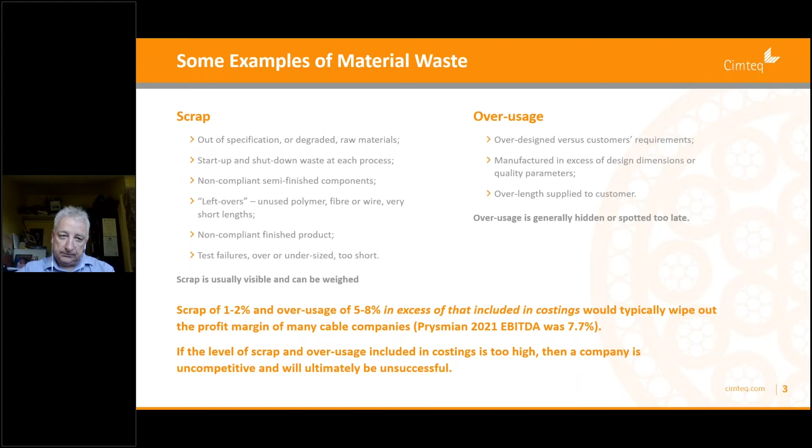Cable making comes in many different forms and many different styles. Our cables can be high volume repetitive cables, standard designs, millions of meters of the same thing, or at the other extreme, low volume manufacturing. That's just how I've chosen to split cable manufacturing, just to try and make it a little bit simple for today's presentation, because it does impact on how we manage materials.

In a high volume environment, it's very price competitive, so there's a strong need to manufacture towards the bottom end of specifications wherever possible, and to engineer cost out of our designs and out of our manufacture. These are also typified by long runs with few changeovers that still need to be slick and efficient in their wastage of materials, but they're less frequent than in the other type of manufacturing. Often they're in standard lengths, either a single manufactured length or many drums cut from a single length. But we can still end up with leftovers and pieces at the end in terms of scrap.

They are usually typified by minimal leftover materials between processes, because we tend to run out the copper, run out the plastic, run out the aluminium, then start a new batch. So we don't tend to have that much waste on materials, but you could on conductors. High volume manufacture really does set itself up for statistical analysis, a standardized approach, and automation. I know many of you invest in those things, but we should be really thorough analyzing our statistics, absolutely on top of our material usage, our overusage, and our scrap in a high volume environment.

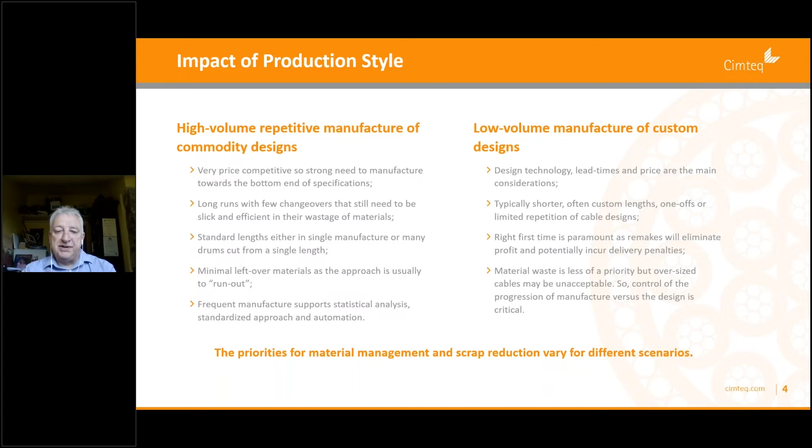Good material management requires good control. I've said here control of production processes and control of production. I've just split them to emphasize a few points.

In terms of controlling the process of production, the point at which material is converted into a subcomponent or cable, we have to make sure we're using the correct input materials and semi-finished products. We could have lots of things on the shop floor that look the same but have been set up for specific orders. If operators select the wrong length of conductor or the wrong insulated core, we could end up with a short length on an order, and also used something due for another order, meaning a remake. So having good traceability of length through manufacturing is important.

We've got to make sure operators have very clear instructions and quality instructions about how to set up the process, how to monitor it, how to monitor quality during production, and how to record their data. If they see a variance, they should be seeking assistance, and absolutely recording all information accurately.

Supervision here, in terms of control of production, has an overlap. Supervision has an active supervision responsibility to make sure operators are doing those things to the required standard. That's simple walking around, checking, maybe repeating some measurements, because people do what you review. Making sure we're getting the right data for production processes ensures we've got the right information to understand our material usage.

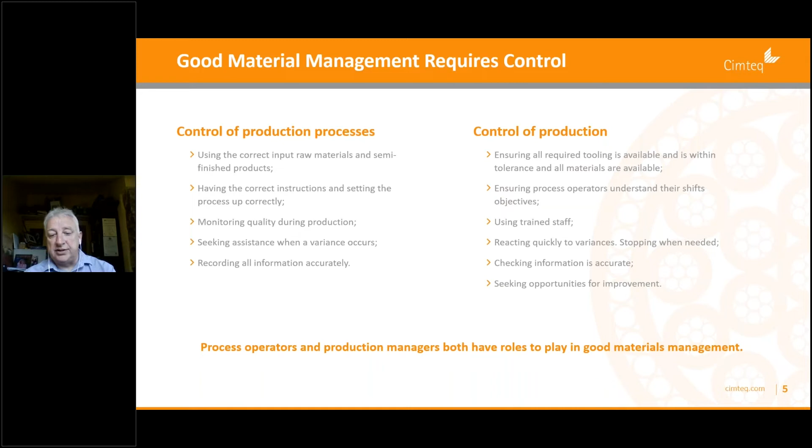It's the role of supervision and management particularly to look for opportunities for improvement. They should be looking at the data, looking at their waste, and identifying where things can be improved. Both operators and managers have a role to play in good materials management.

Some basic critical success factors, to boil that down: minimizing overusage, designing to the minimum possible based on the process capability demonstrated within your plant, and updating this over time. If we have a particular process capability and have to make a radial thickness a little bigger than the minimum because we don't want to infringe it, that's fine. But if we improve our concentricity or control and are capable of reducing that down towards the minimum, absolutely we should be doing it.

Use inline measurements and feedback control wherever possible. It's a statement of the obvious, but have we got diameter measurement? Have we got radial thickness measurements online? Are those instruments working? All those good things are just basic fundamental cable making, but it's surprising how often those things either aren't working or are on the wrong machines.

Gather data, analyze it, learn and improve. We should spend as much time on materials as we do on manpower productivity, which sometimes gets greater emphasis even though it's a lower cost. We really should be spending our time looking at our material usage and scrap, and identifying opportunities to improve.

A particular one is understanding length optimization in your specific processes. This is when we start off at the beginning with 1,030 meters, we end up with 1,020 meters at the next process, 1,010, and we're making a kilometer for the customer. Just understanding your particular environment for your designs, and the losses in length, can save an awful lot of materials.

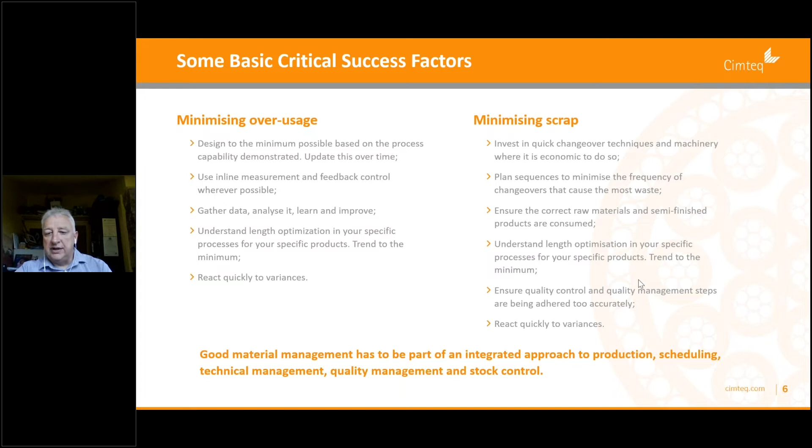That's me setting the context. I'll now hand over to Amanda, who will describe how the products from Cimteq address some of those issues. There you go, Amanda.

Thank you very much for that, Bill. So I'm going to continue now, and I'm going to do a short introduction to Cimteq products and talk about what we can do to help solve some of the issues that Bill has been talking about. So in Cimteq we have two main software solutions: the first being CableBuilder for cable design and quotation, and the second being CableMES for manufacturing execution.

In terms of CableBuilder, it's an extremely flexible solution. Designed so you can use it for designing all types of cable across all sectors, from the simplest to the most complex. It can be used in a single plant environment or indeed a multi-plant environment, and it manages all aspects of plant data—so data for the product, but also process data, the process data that is required to actually run the machines to manufacture the cables.

It has automatic calculations for all the parameters required in the construction and manufacture—things like dimensions, weights, bill of material, running speeds, etc. Anything you can imagine, all these can come from CableBuilder. In essence, CableBuilder really provides the core information that's essential to have better scrap management and more efficient material management. It really is the benchmark that gives us the parameters we need to manufacture to. Without something like CableBuilder and having such a benchmark, we don't actually know how well we are doing.

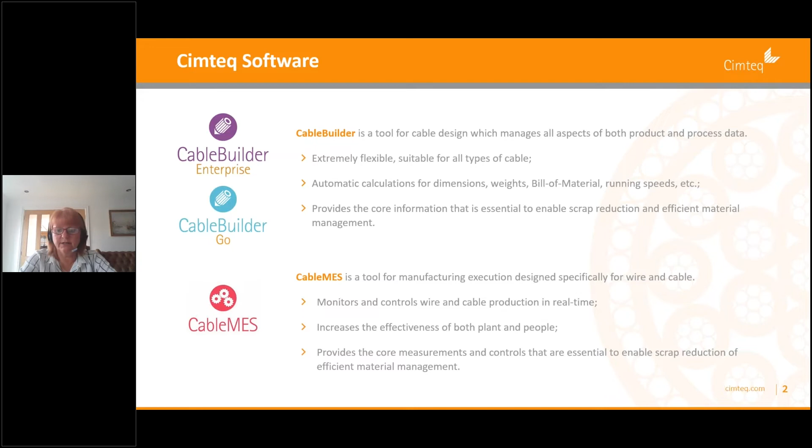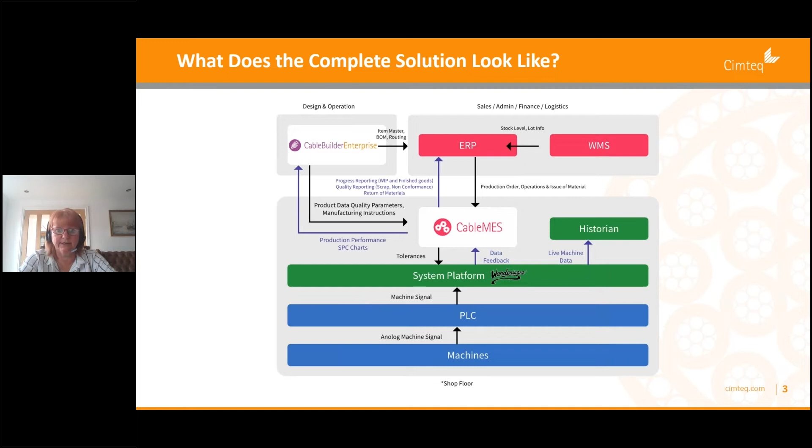So this webinar is actually focusing on MES, so let's have a bit of a closer look at CableMES. So any MES system will do a huge amount of things, and different plants will probably have different focus on what they want their own MES system to do.

CableMES indeed does a huge range of things that we would not have time to talk about today. But for our purposes, what we do, as in Cimteq, we call it the 4 pillars of MES, and we break it out into these 4 areas to try and explain all the things that the system is trying to achieve at quite a high level.

So the first pillar is order execution. And order execution, in simple terms, it's all about delivering to length, delivering on time, while minimising the WIP travelling across the shop floor and minimising waste.

So, of course, excess length is waste material. A short length could indeed be scrap. WIP, of course, is a material. The drums moving around the factory is a very expensive material, and we need to keep a close eye on that. And scrap, of course, is one of the many forms of waste.

Production performance is all about avoiding slow running machines, minimising bad quality product, and minimising machine stoppages. This really is all about OEE. In an ideal world, to achieve 100% OEE, every machine needs to be running 100% of the time it's planned to be running. And when it is running, it needs to be running at the speed specified for that product, making 100% good quality.

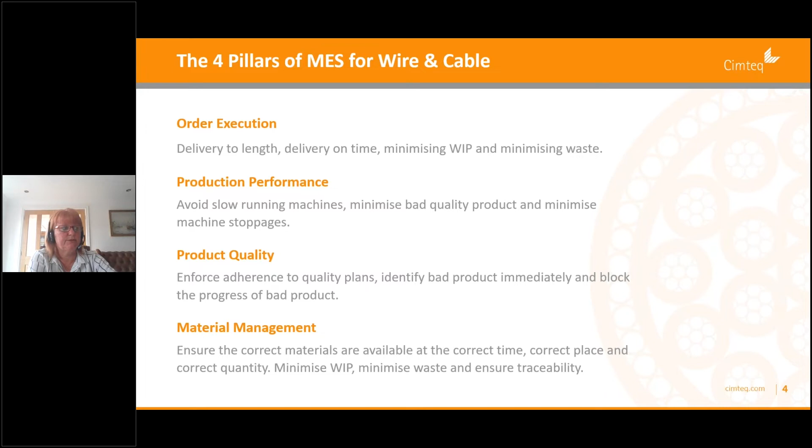So CableMES, all these things I've just described, helps to achieve all of these. That's what it's designed for, specifically to help deal with all these issues. So let's pick on a few topics to look at some things we can focus on.

With CableMES, bad product is minimised. Rigid quality plans and defined tests easily identify what is a bad product, and automatic alarms from the machines and devices also help with this. So bad product is minimised.

Actual scraps should be as expected. The expected scraps come from the benchmark as of CableBuilder. Every process for every product will have some expected amount of startup scrap, shutdown scrap, bleed, or whatever it is. But with CableMES, all these types of scrap are measured, so any scrap produced is measured and recorded. We can then compare scraps produced to the actuals, to the ones we expected, and if there's a discrepancy, this can be identified, looked into, and resolved.

Finally on here, leftover raw material scrap is minimised. In CableMES, all materials are tracked with the quantities and locations known in real time. So any small leftover batches can be minimised or joined together, since all materials are visible, so things can be moved around in order to minimise the waste of leftover raw materials.

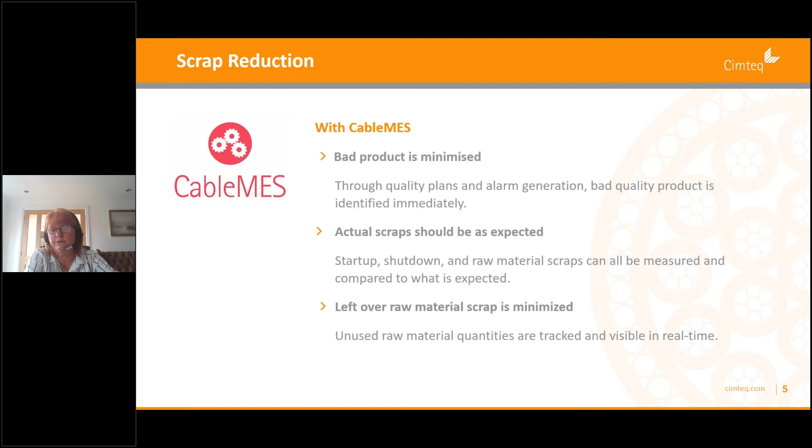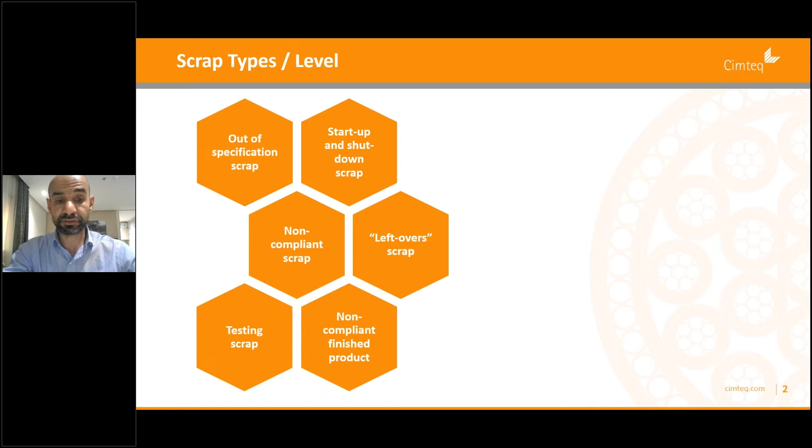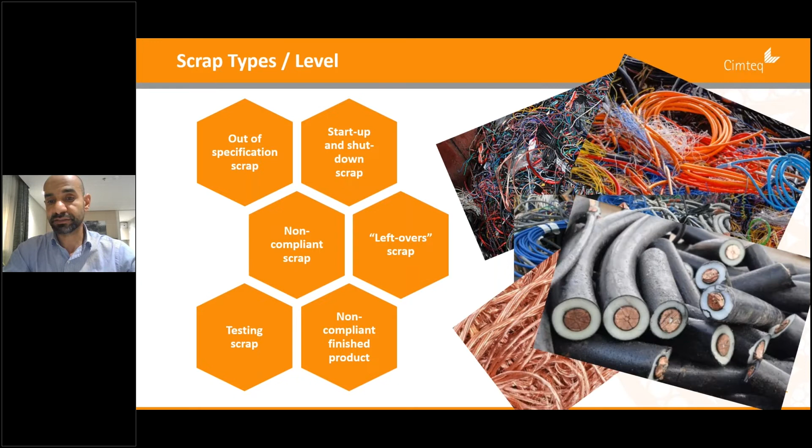So we have two non-compliant categories, for the semi-finished and the finished good. As you can see here, a couple of pictures show the scrap we see daily, weekly, monthly in our units, and how valuable it is. So we'll come back to describe and focus more on the scrap, or out of specification scrap.

Out of specification scrap - as described by Amanda, we have two systems, or two solutions, that Cimteq could provide to help your organization and business. We have CableMES, which is the main tool controlling the shop floor in terms of respecting the specification, following exactly what it receives, the input from CableBuilder Enterprise. CableBuilder Enterprise plays a big role describing initially what has to be done on the shop floor.

With good harmonization between CableBuilder Enterprise and CableMES, we ensure that what we've done during costing and quotation, and what we got as an order, will be implemented and produced well on the shop floor, using both tools - the one controlling technical costing and sales, and the other controlling the shop floor team.

Startup and shutdown scrap - this too could be organized and described well in CableBuilder. In the coming slide, you'll see how the flow of data between CableBuilder and CableMES moves in terms of material, bill of material, operation, setup, running time, setup and speed, as well as the scrap.

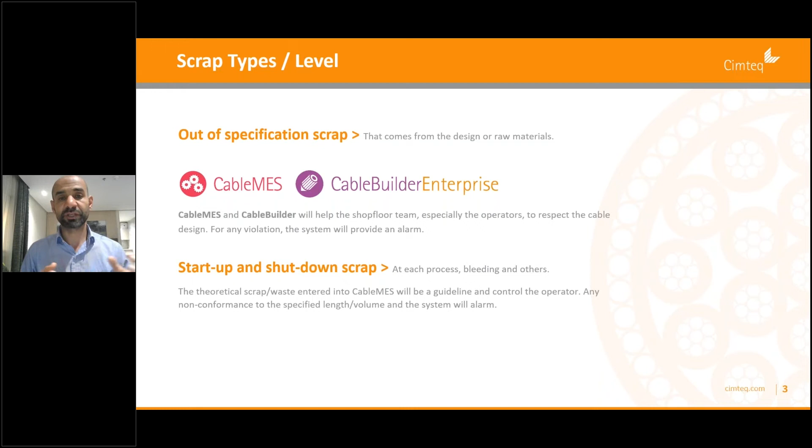The scrap can be described in different ways, and it's a flexible platform - you can describe what you want. If you want to describe only one single scrap type, double scrap, whatever kind of scrap you'd love to describe, the flexibility of CableBuilder Enterprise will help you do that. This information will flow from CableBuilder to CableMES.

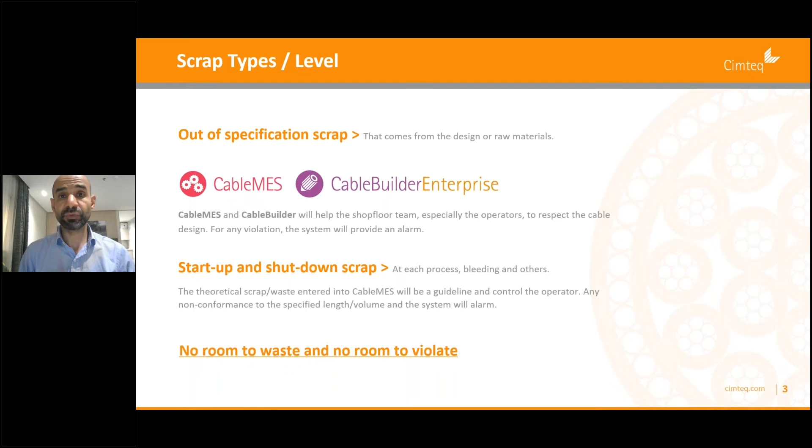Last but not least, the main message of the slide is: no room to waste. No room for us to waste material, and no room to violate the standard. Next, we have non-compliant semi-finished product and finished product. The problem is, the further you go to finished product, the higher the cost of scrap. But for semi-finished product, the cost or losses can still be managed.

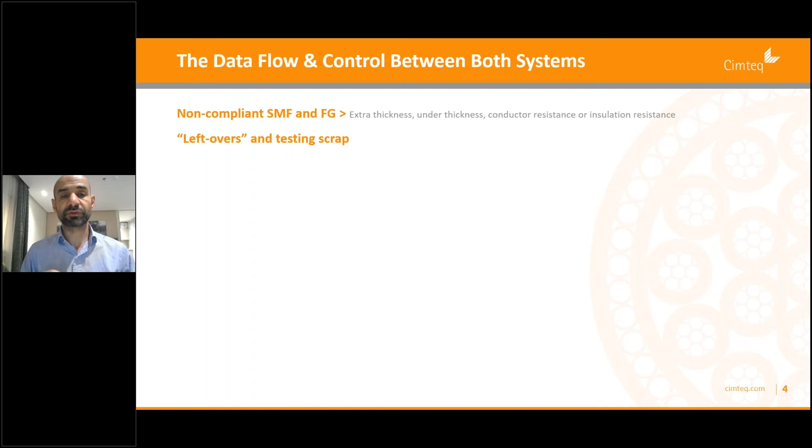This is an option, the main function of CableMES, as described by Amanda. When we come to the flow chart, it's similar to the one provided by Amanda.

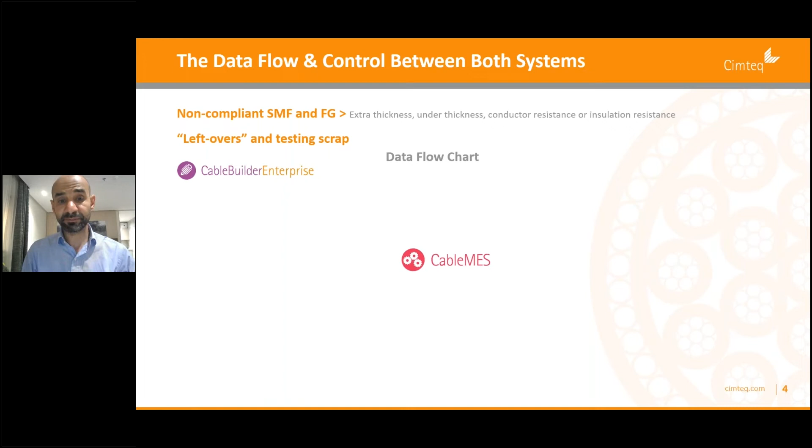We have the two systems - just a moment, let me use the pen. We have the two systems. The first is where we design the bill of material. We describe the routing parameters in terms of which machine to use, what the speed will be, the setup time, how many operators, and the expected cost behind each operation.

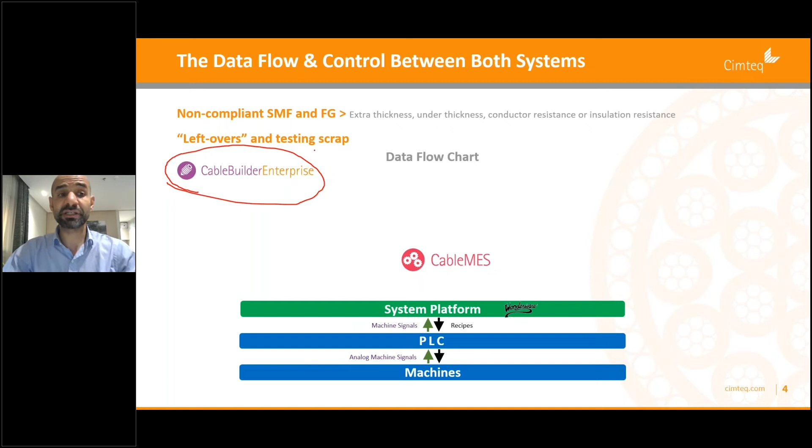This is described in CableBuilder Enterprise, and then we have CableMES, where we see the flow of information between both systems. You'll see two different colors of arrows - the black color is theoretical information coming from CableBuilder, and the most advantageous option we have in CableMES is the feedback.

From the real life to theoretical life, and how the real life will challenge the theoretical life, and how you can compare both - if I'm producing well matching to the standard, or if I'm losing, or if I'm saving. So in both ways, then the production order, the operation parameters, bill of material, quality control chart.

One of the most important modules we have in CableBuilder Enterprise is the quality control chart, where it will challenge, judge and control what is produced by the operator in the machine, in terms of thickness, in terms of resistance. Instead of producing a big quantity of copper or metal and finding that the resistance or setup parameter or the lay is not matching with the theoretical one, the CableMES will play the big role to stop and catch all those not well-defined or not well set up parameters.

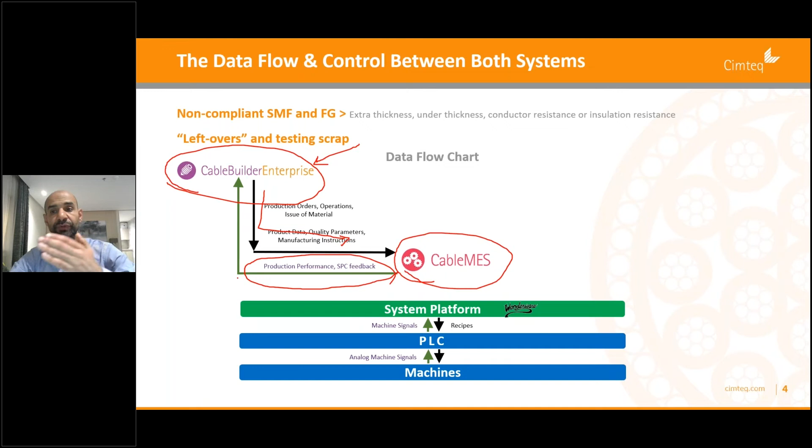Then you will also see the green arrow where we have the real life going back to theoretical life, and it will challenge what we have designed initially.

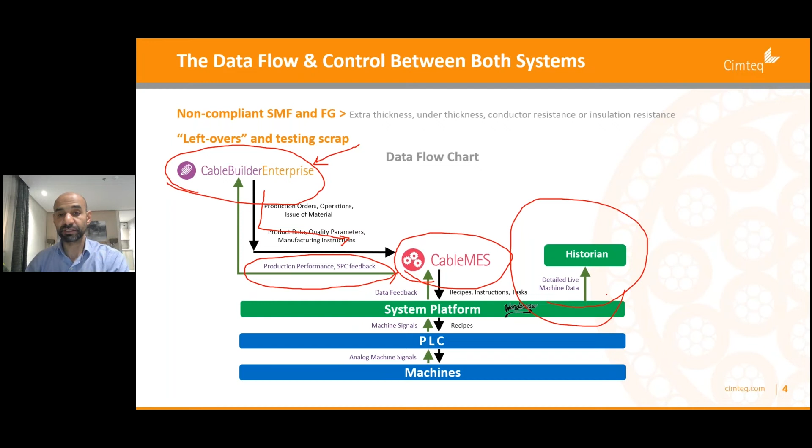And last but not least, here in this slide is this big portion of historian data. Today I'm producing, for example, a cable in 2022 with one parameter, operation parameter, and bill of material. After 3 years, it will be easy for me to go back and see what I have done 3 years ago. So if the operator tries to use over quality or minimize the quality, going below the specification, the system will be a guideline for him. The system, I mean CableMES, will tell him, yes Hamada, you are doing something good, or you are violating the standard, and the result will lead to scrap.

And the same issue or point we will find in CableBuilder Enterprise, that you will have a comparison between version 0 up to version whatever, 100, 200, 300. So it will be easy to go and compare what I have produced or designed 10 years ago compared to today's design.

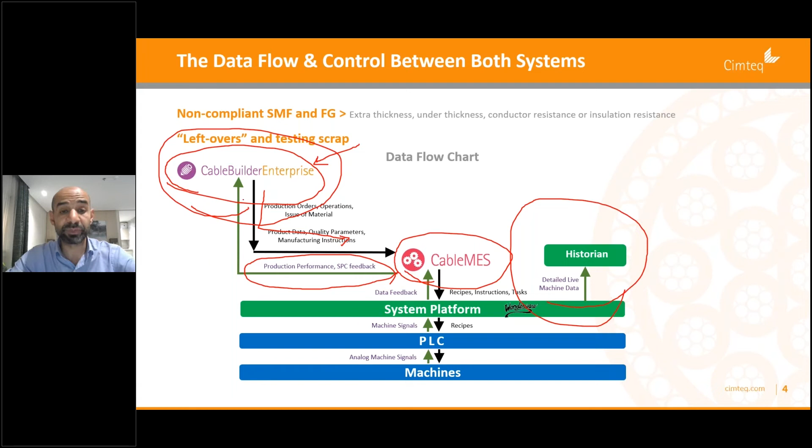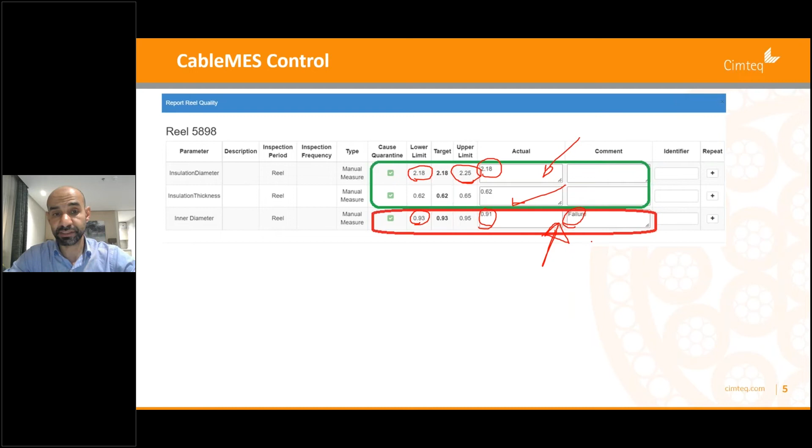Here the system will tell you that you're producing something wrong and will stop you at this limit. The second example is more focused on the kind of messages, kind of orders that the system will help you control and stop at a certain limit, to not produce or go further with wrong production. Last but not least, if you want to authorize the system to go ahead even violating the standard, it's up to you - you can continue. If not, you can stop here and take a common decision that we will go ahead, or we'll scrap, or we'll do rework on this part.

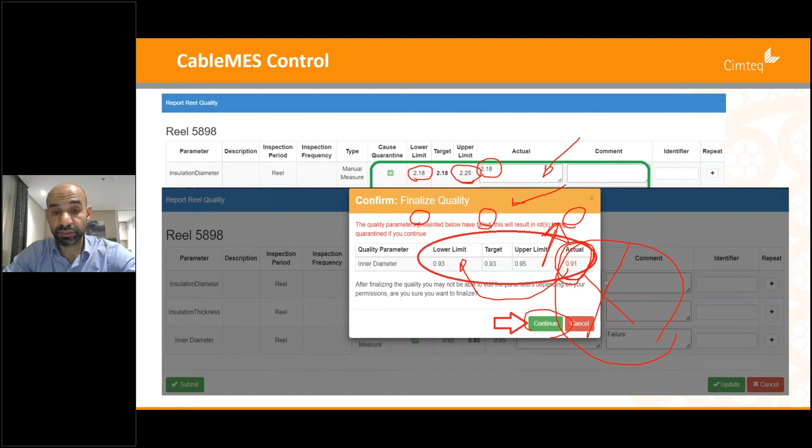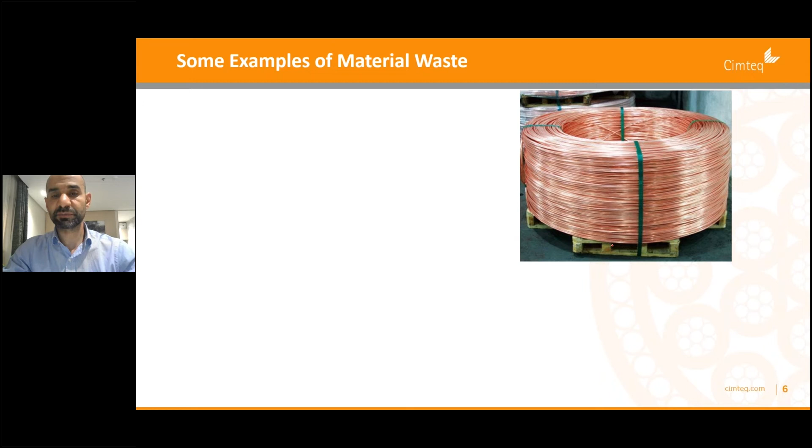The second one, I will show you a couple of examples for material handling and material management inside the factory. I like to always start with the metal example, because the metal itself presents more than 50% of the cost breakdown of most cables. So we start with copper, and we have the polymer, metal, steel, and the expensive metal.

Then we will see the flow of receiving the material and how the system will help you track the material from the day you receive it inside the factory. First, we receive the material inside the factory, then we issue the barcode, and then we go to visual inspection. If the material is okay, the system will allow you to flow the material to the next step. But if it's not okay, the system will help you generate a non-conformity (NC) to the supplier, and even track all this non-conformity to the suppliers. All of you know how much of a headache it is when you have non-compliance of raw material. Then we go to the next one.

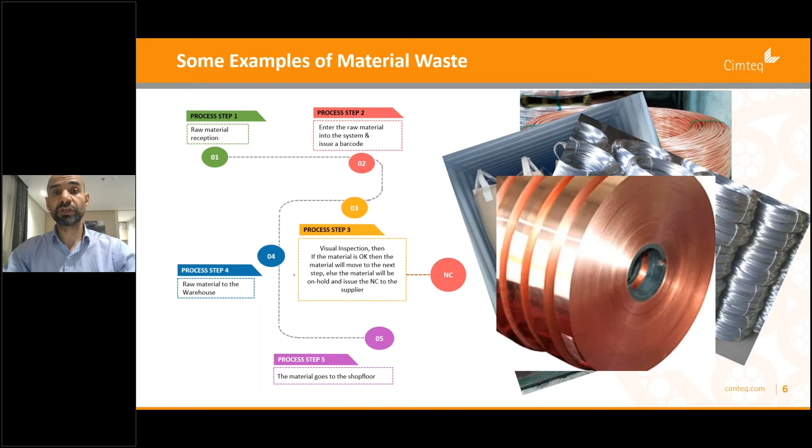The raw material will go to the next step, which is a warehouse, and the last point is when the material is in the warehouse, waiting for the order from the shop floor to issue material to specific orders. One of the most important things for us, tracking from A to Z, from the first point until material usage on the shop floor, is the barcode system.

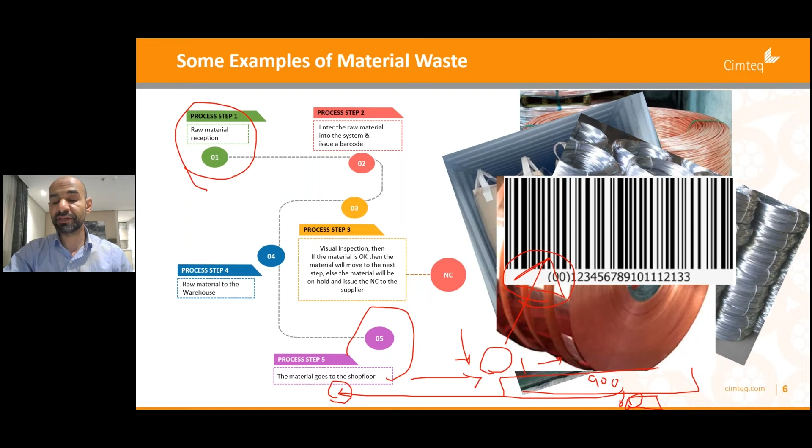The barcode system will help us track each and every gram that enters the system and goes inside the factory. For example, if you issue 1 ton of PVC polymer to a specific order, and the order only uses 900 kg, the remaining 100 kg can go back to the warehouse, or to the next order, or to the next machine. So with the system, you will even track this remaining hidden raw material that we don't see visually.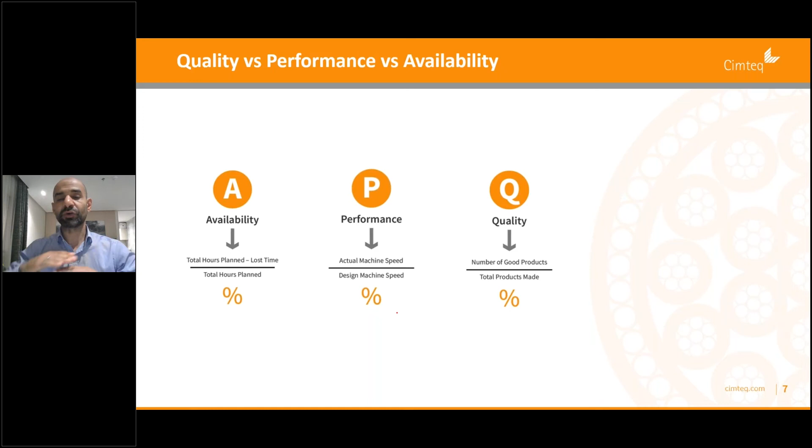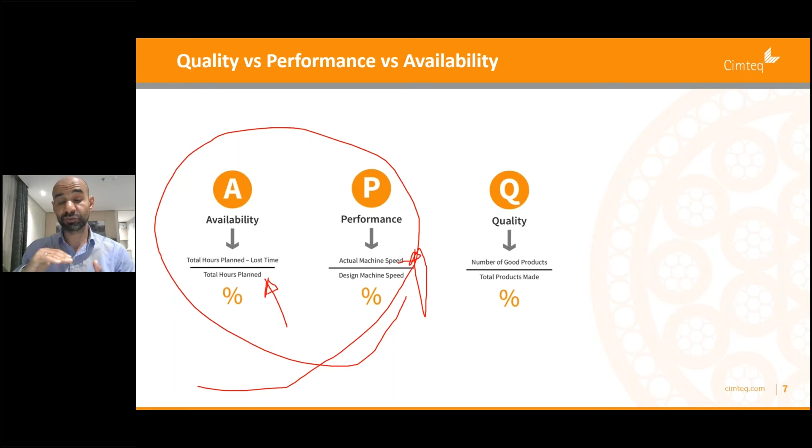This slide shows a comparison between quality, performance, and availability inside the shop floor. As you know, if you go lower with quality, you will produce scrap, which impacts the performance of the overall plant and leads to non-availability of the machines. So when we talk about quality, we mean it, because improving or maintaining quality at a certain level protects the other two parameters: the performance of my unit and the availability of my machines, which leads to receiving more orders and maintaining the good performance we expected, as Amanda mentioned.